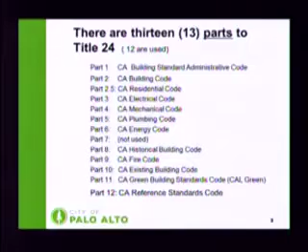California Code of Regulations, known as Title 24, has 28 titles. There are so many different ones. For instance, Title 13 is DMV, that most of us have dealt with. But Title 24 is the California Building Standard Code, and that title by itself has 13 parts to it. Part 2.5, added recently a few years ago, is the residential code—they came up with 2.5 so they can put it right next to the building code. After that is Part 3 electrical, then mechanical code, plumbing code, and Part 7 used to be elevator code, which they moved to Title 8, so that's not being used right now. All the way down, the most recent one is Part 11, which is CalGreen.

If a jurisdiction chooses to make amendments, they will. We went through City Council last week, actually a week from last Monday, and it was approved for the first reading. The second reading will be November 18th, and after that, January 1st will be the effective date of that code with Palo Alto amendments. If a jurisdiction chooses not to have their own amendments, they just adopt what the California code is, and again January 1st is the effective date.

For your information, the 2015 I-Code is already finished and completed—2015 IBC, IRC, IFC, they're all completed. They're not printed yet, but I think IBC 2015 will come out probably in March or April. That will become the 2016 California Code, effective January 1st of 2017. They're way ahead of us.

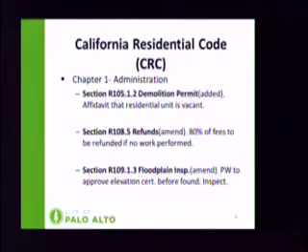Continue with the administration section of the code. Reinspection, we added also that one in there. Reinspection fee will be levied if no inspection card is on site, if no approved plans are on site, no access provided to the inspector when he comes for inspection, and work is different from what shows on the plans.

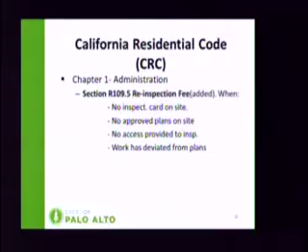Table R301.2(1), I don't have it here, but that's a table that, if you have noticed it, is always blank in the code, and it leaves it up to the jurisdiction to fill it out. A lot of jurisdictions just skip it, they say it's not important, but we filled it out this time. It just gives the local information as far as what's the yearly temperature of the city, what's the annual rainfall. Because when you look at the residential code, there's at least 10 to 12 different parts of the code that make a reference to that table, assuming that the table is already filled out. So this time we filled it out, okay?

Window well fall protection, this section is added. This is not even in the code, and I'm tempted to bring it up in the 2018 code, see if I can put it in the IRC code. Window well fall protection, normally what they do, they put some kind of grate on top of the window well. That doesn't work out very good because you could always put some boxes on top of it, or a car can be parked on it. So the person coming out from the basement cannot push that grate up to get out. So we required that to have guards around the window wells.

And some of you are already doing that anyway. And then that has to have a ladder, and if you choose to have a gate, then there are some requirements for the gate. Okay, but you don't have to have a gate.

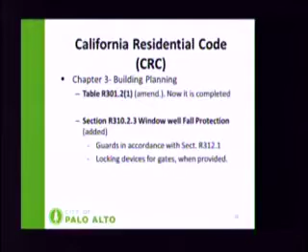Security bars, we added that section also. That section needs to have fire department review and approval, okay, before we allow it.

Here we're coming to 1 and 2 family dwelling automatic sprinkler systems. The next few slides are about sprinkler systems. Throughout all the new basements, it's required to have an automatic sprinkler system. Throughout existing basements that are expanded more than 50%, you need to have a sprinkler system.

Oh, go ahead. The floor area, yeah. I have a fire marshal here. Acting fire marshal, by the way, Rich Dean is here, and Rich, you want to chime in? Okay.

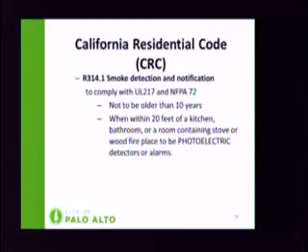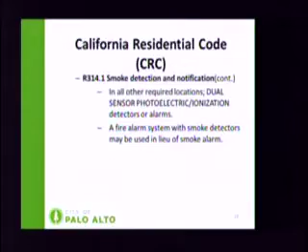No, bathroom was always there, wasn't there? Yeah. Pardon? What was the question? Whether it was near a bathroom, I'm not familiar with that. I remember it was near a kitchen or a fireplace. So I didn't realize bathrooms were a dangerous place for fire.

Okay, and in all other required locations, dual sensor photoelectric ionization detectors or alarms, or a fire alarm system with smoke detectors, may be used in lieu of a smoke alarm.

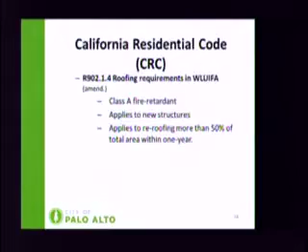Roofing requirements in wildland urban interface have to be minimum class A fire retardant. This applies to all new roofs, and if they are doing any re-roofing of more than 50%, then it has to be class A.

Foundation on expansive soil: this table is actually table 1809 in the California Building Code. It's not in the residential code, but we brought it in because there wasn't anything in residential code to substitute it. We modified it a little, but nothing big changed really. You still need minimum 20 inches from the dirt - that's the big thing, but other than that it's pretty much the same.

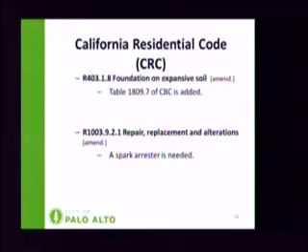Anytime you make any repair, replacement, or alterations, a spark arrester is needed.

Now we're going to California Building Code, this is part 2 of Title 24. Here we have only adopted one appendix, which is Appendix I for patio covers, so other appendices are not adopted. In Chapter 1, I didn't repeat all of it because Building Code and Residential Code both have the same Chapter 1 administration, so I mentioned some in residential and some in Building Code.

By the way, any amendment that we make in Palo Alto, we have to justify it to the state. The amendments we make, which differ from California Code, cannot be less restrictive than California Code - it has to be more restrictive. And even then, it still has to be justified with the California Building Standards Commission.

Administrative sections don't have to be justified, but anything other than administrative has to be justified based on topographical, geographical, or geological factors. Any of those 3 items unique to Palo Alto, then we can make that change in the code, saying because of the San Andreas Fault close to Palo Alto we have to make this change, or because the west side of Palo Alto is hillside and it takes a while for a fire truck to get there, we need so and so. So those have to be justified, which we already have, and when we send them to the state, that has to be filed with the state also.

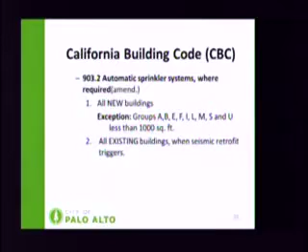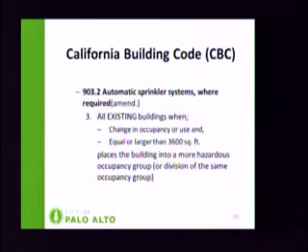All existing buildings, continuation of the previous slide: when there's change in occupancy or use, and if the building is equal or bigger than 3,600 square feet so that it puts it in a more hazardous occupancy or group or division, then this could trigger also. For instance, if you're going from B occupancy to H occupancy, this will trigger.

All existing buildings, when modification creates an increase in fire area to more than 4,100 square feet, or modification equal or greater than 100% of the existing building, whichever is more restrictive. Now that 4,100 square feet came from what we used to have, 3,600 square feet plus a margin of 500 square feet. So now we just put it all together for 4,100 square feet.

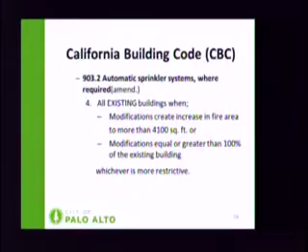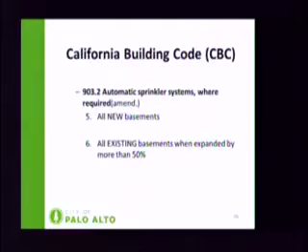Continuing again with sprinkler system, all new basements, just like the other one, residential. And again, if you are expanding by 50%, you need to have sprinklers.

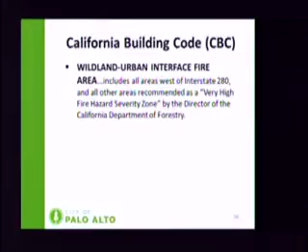This is the definition of wildland urban interface fire area that I explained to you. It's a little longer, but I put just a piece of it in there. It says any area west of 280, and all other areas recommended as very high fire hazard severity zone by the Director of California Department of Forestry - I told you fire marshal, but that's forestry.

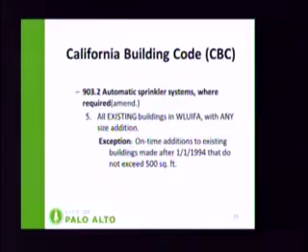Okay, automatic sprinkler system, continuing again with this, same as what we had in residential, basically.

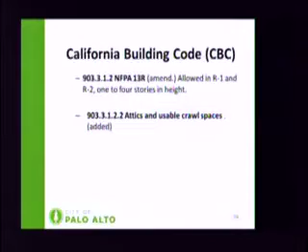NFPA 13R is allowed in R1 and R2, 1 to 4 stories in height. So if you want to put full 13, you're okay. If you want to put full 13, you're okay, but as a minimum 13R is allowed as long as it's not more than 4 stories in height. And attic and usable crawl space are added that they require to be sprinklered as well.

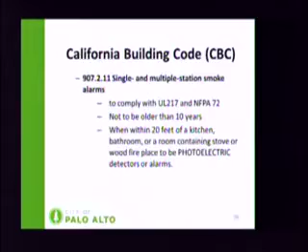Single and multiple station smoke alarms have to comply with UL 217 and NFPA 72, again not older than 10 years, same as what we had in residential code. This was the same as residential code.

We also have, this is added in the code in Palo Alto, roof guards at interior courts. This has always been there, which is if you have courts that are bounded on all sides, you're supposed to have guardrails 42 inches. This is mainly for protection of firefighters when they go on the rooftop in the darkness. They don't know that there's a court in the middle of the building, so they don't go over. So if there is a court that is bounded on all sides, then you have to have that 42-inch guardrail, and the intermediate rail should not be spaced so that a 12-inch sphere can pass through.

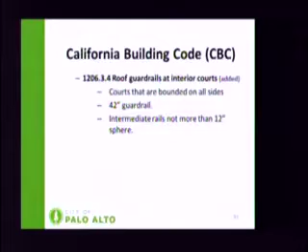Roofing requirement, again in building code, Class A fire retardant, and applies to all new structures, and if you are doing more than 50% re-roofing, you need to have that.

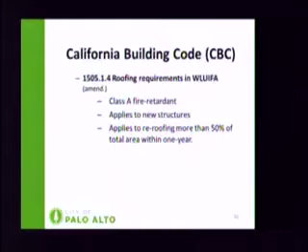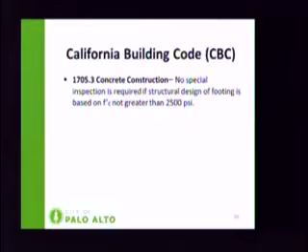Concrete construction: no special inspection is required if the structural design of the footing is based on F'c of not greater than 2,500. There are times that on the plans an engineer or architect specifies 3,000 or 3,500 PSI concrete, but the design is actually based on 2,500. If the design is based on 2,500, then we're not going to require special inspection.

It would be a good idea to specify both of those on the plans, to say design is based on 2,500, but we're requiring 3,000 or 3,500. That's great, you're requiring something more than what design is asking for, but there won't be any special inspection. In fact, this reminds me to discuss another thing with you guys.

The 3 chapters of ICC, Peninsula chapter, East Bay, and Monterey chapter, have a committee called Tri-Chapter Uniform Code Committee, TUCC. We meet once a month, the second Thursday of the month from 1:15 until about 3 o'clock at the City of Milpitas. We bring up issues with code interpretation and try to make a uniform code interpretation throughout the region, so that if you go from one city to the other, you won't be shocked with different requirements.

This was one of the things that was brought up in TUCC, and in fact if you go on East Bay ICC chapter, which I hate to say is better than Peninsula chapter, they have a lot of these policies and procedures that we agreed to. They have posted them on the website. There are some really good ones. We posted them on the website so that if a jurisdiction wants to adopt some of those, it's already there.

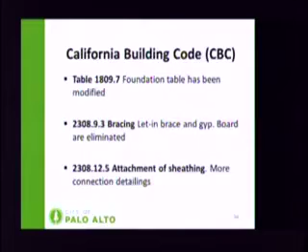This is, again, conventional construction where you don't have shear walls, but you have braced panels. The code doesn't say how you're going to attach the brace panel to the roof. However, you do count on where the brace panels are. In the absence of any calculations, the code says you have to have so many brace panels, so many feet apart, and so on. But it never tells you how it's going to be connected to the roof diaphragm. So we have some details there.

Seismic evaluation and design.

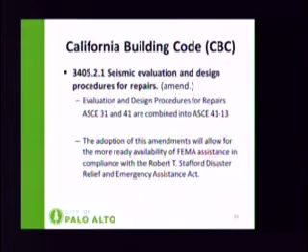Procedure for repairs - this one is also adopted by quite a few cities around here. In Chapter 34, we've expanded it a bit longer. If you have a repair, you will do that with ASCE 31 and 41. In combination, adoption of this amendment will allow for more readily available FEMA assistance in case of any disaster. When I was in San Jose, we were told that putting this in the code gets you FEMA funds much easier, so we did that in San Jose. In Palo Alto, they did that last time around, and we kept it again. Chapter 34, existing structures.

Let's see. Okay, what do I have here? Existing structures. Now I'm going to mechanical code. 34 hasn't changed a whole lot - I don't know why that is in there, I must have forgotten to take it out.

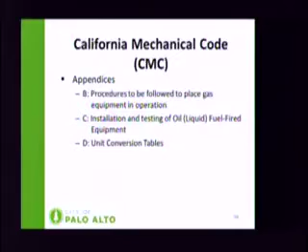Mechanical code, which is part 4 of Title 24, we have made some amendments to that. The appendices we have adopted are procedures to be followed to place gas equipment in operation, installation of testing oil, and a conversion table.

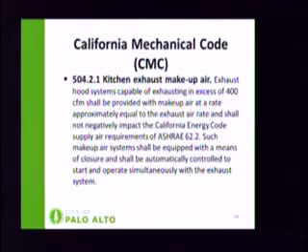Kitchen exhaust makeup air: exhaust hood systems capable of exhausting in excess of 400 CFM shall be provided with makeup air at a rate approximately equal to the exhaust air rate and shall not negatively impact. Maybe I can ask Brent to explain a little bit more on this one. Brent Hipscher, by the way folks, is our applied mechanical inspector.

Okay, thank you. This is new, by the way. Yes, sir.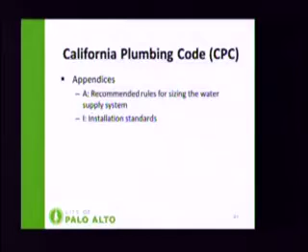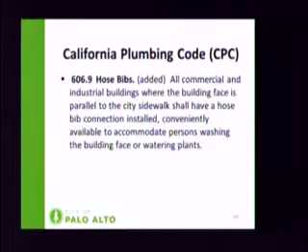Plumbing code, part 5. The appendices we have adopted are recommended rules for sizing the water supply system and installation standards, two appendices only. Hose bibs are required for all new commercial and industrial buildings where the building face is parallel to the city sidewalk - you're required to have a hose bib.

This one here: copper or copper alloys, lead and lead alloys, including brass, shall not be used for building sanitary sewer systems, except for domestic waste sink, traps, and short length of associated connecting. This is also existing - we haven't added this, it's not new.

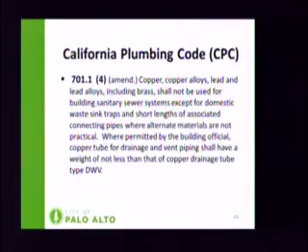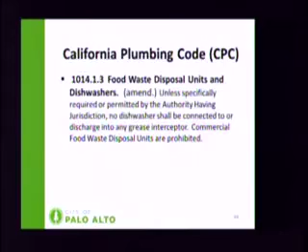Food waste disposal units and dishwashers: unless specifically required or permitted by the authority having jurisdiction, no dishwasher shall be connected to or discharged into any grease interceptor.

This one is something we added this year - non-potable water reuse system, which is Chapter 16A in the California Code, and we specifically specified it as something we're adopting. I don't know why this is going back into residential again.

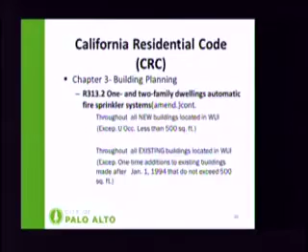Okay, now we're going to fire code. Rich, you have a couple of those you want to talk about? Let's see, even I have a hard time reading that. Basically, on new construction or major remodels where plans are submitted, we'll be requiring a site map specific to the fire department to be submitted, and it would have standardized symbols showing where shutoffs are for electrical, stairways, elevators, those types of things.

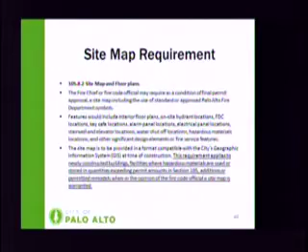It'd be submitted in a format compatible with our GIS system, and ultimately this allows us to load these into our mobile computers that are on all the fire trucks and police cars. We'll be able to pull up a footprint of the property and identify all the key points of the property.

Is there any questions on that? Probably a PDF. Yeah.

We'll put one on our website, but initially we'll accept pretty much all the standard architectural legends. It'll be a condition of the final.

In this one, we've always had the policy which gave us authorization to remove weeds. It also encompassed combustible debris, but we wanted to include combustible debris in the main body of the title because there was debate whether or not it included construction debris, materials, furniture, and so on. Nothing's really changed, it just cleaned it up and made it more clear.

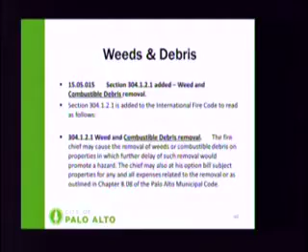Everything else, and that's about it.

Okay, next one is California Existing Building Code. Like I mentioned earlier, California Existing Building Code has two chapters to it, A1 and A3, which they adopted from the International Existing Building Code. And then on top of that, we adopted three other chapters, A2, A4, and A5. A2 has to deal with...

...reducing hazard in existing reinforced concrete and masonry wall buildings with flexible diaphragm. Flexible meaning plywood diaphragm. And then the other one is earthquake hazard reduction in existing wood frame residential buildings with soft, weak, or open front walls. The last one is masonry infill buildings.

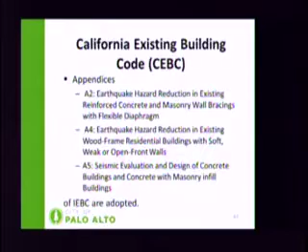The other two that are already in the California code, one of them is unreinforced masonry buildings, and the other one is buildings with pony walls. Those are already in the code. So there are 5 chapters to the existing building code.

I don't know why these are, anyway.

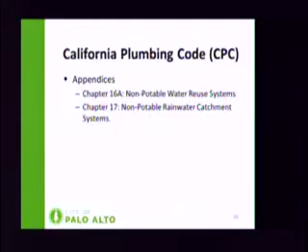Okay, now we're going to everybody's favorite, Green Code. Green Code is part 11 of Title 24. And in the Green Code, we have adopted all the mandatory measures of CalGreen, which is the minimum requirement by the state anyway. And then we have adopted appendices A4 and A5.

A4 is residential voluntary measures, and in there we have adopted 2 sections specifically. And then A5, which is non-residential mandatory voluntary measures, Tier 1 and Tier 2.

Yes, because remember what I said earlier, appendices are not adopted automatically unless you specify them in your ordinance. So if he hadn't said anything about A4 and A5, we would have only adopted mandatory measures and that was it. A lot of cities have adopted only mandatory, like San Jose, and some other cities have adopted voluntary Tier 1. We have adopted Tier 1 and Tier 2 in case of non-residential.

And a whole lot more that is exclusive to Palo Alto, like the one that Catherine talked about earlier, there's a lot of other requirements on water conservation. I haven't brought everything here in the slideshow, but if you go into the Muni Code, you will see that there's a whole lot more. Our new upcoming ordinance for CalGreen is, I think, about 12 pages, but I've got only a few slides here.

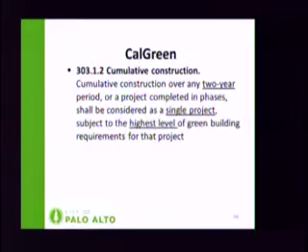Cumulative applies to the building. For instance, if you have a building that was designed and built new, obviously, then is a commercial building, let's say an office building, is subject to mandatory requirements and Tier 2. And then you come back and you do the first time TI in there, that should follow the same requirement, which is mandatory and Tier 2. However, let's say 6 years later, that tenant moves out, another tenant comes in, then that is mandatory and Tier 1.

So Tier 2, that 2-year requirement is required within 2 years, and it's considered as a single project. This is similar to accessibility, when it says you have to accumulate over 3 years, that 20% thing that you all know about, that you have to accumulate, and once you go over that $140,000, then you don't have any more 20%. So this is similar to that. It says subject to the highest level of green, so whatever the shell was subject to, the TI will be the same thing.

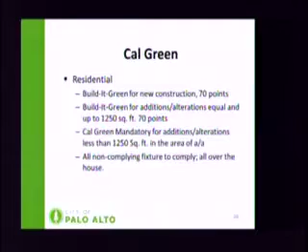But the last bullet says all non-compliant fixtures have to comply throughout the house. That's in the CalGreen requirements, not Palo Alto.

Pardon? No, water fixtures. So if you have any alterations or additions to the house, regardless of which part of the house, then all the water fixtures, toilets, sinks, shower heads, they all have to be brought to water conservation compliance. Yes, sir.

Regardless of square footage, yes. And this is something that everybody's having a hard time with. But we went up and down the peninsula talking to a lot of other jurisdictions, city attorneys, and so far that's what it is.

What structures? I haven't seen anything in there, but there is an Assembly Senate bill, actually. Senate Bill 407, if I remember right. I'm kind of blank right now, but I can email it to you. In there, it explains it. I don't recall seeing anything on historical buildings.

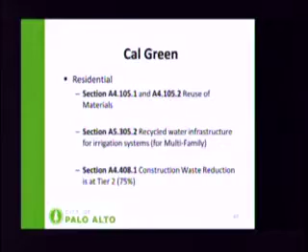And then on A5.305.2 talks about recycled water infrastructure for an irrigation system. This is for multifamily. And then construction waste reduction, we have adopted Tier 2, which is 75%. And then non-residential, like I said, is new construction is CalGreen mandatory plus Tier 2, for existing construction, CalGreen mandatory plus Tier 1. And that applies to additions more than 1,000 square feet, or alteration more than $200,000. Remember, this was 1,000, used to be 2,000 until July of this year, and that 200,000 was 500,000.

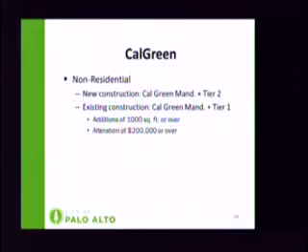So in July, state had an amendment, a supplement to the current code, and they changed it to that. Yes? 200,000, that's the valuation that the applicant puts on the building permit? Yeah.

Next few slides, I'm sure you can't read this, but we have these flow charts posted on our website for non-residential and residential. We have put CalGreen, all the mandatory measures that we have adopted, plus Palo Alto requirements, and we have come up with this flow chart, which is pretty useful because you go through it and it tells you what you need to do for your project. This non-residential one is about 3 pages, and residential is about 2 pages. These are good until the end of this year, and then we have to change them a little for next year. But go and look at them.